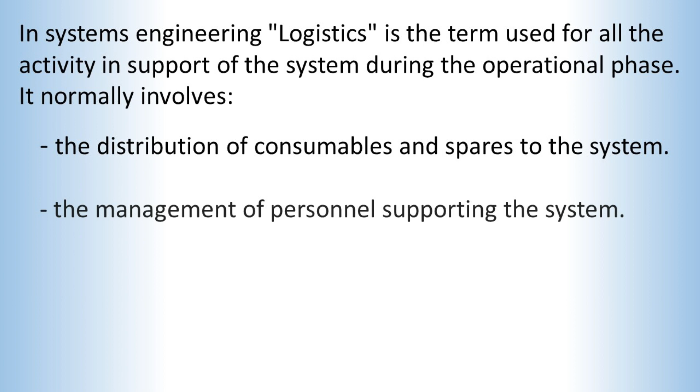In the systems engineering concept, logistics is the term we use for all the activity in support of the system during its operational phase, particularly from the player's point of view. It involves the distribution of consumables and spares to the system in the field, the management of support personnel, the maintenance of the system, any validation exercises, and indeed anything that is done to the system during its post-delivery lifecycle stages. The first three are primarily related to maintenance, and as they dominate, maintenance is often used as a synonym for logistics. So let's look at maintenance, what it is, and some aspects of how it influences design.

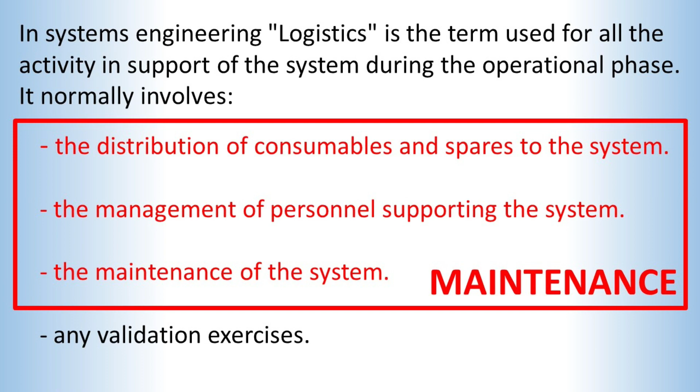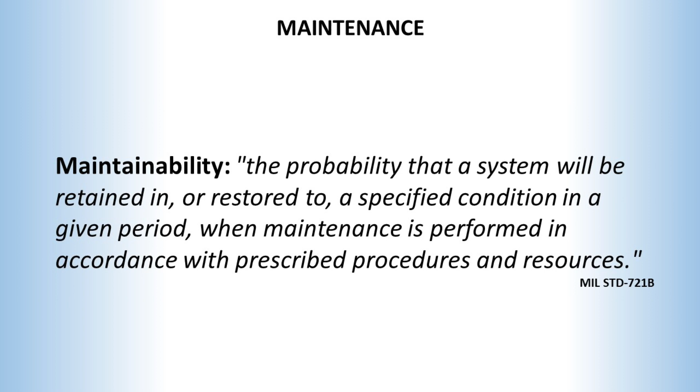As you are probably by now aware, my starting point for any new concept is to look at the definition of the word. So let's look at the view of the United States Department of Defense, who, with all those aeroplanes, warships and tanks, have a great interest in maintenance. So this is the definition of maintainability in the official United States standard on how maintenance should be incorporated into defence products.

There are several points about this definition that we should note. Firstly, it mentions both retained in and restored to, from which we can conclude that there may be at least two different types of activity. Secondly, note that success is defined as maintaining a specified state, that is, meeting its objectives. It relates to sustaining the system's quality. Thirdly, using the word prescribed implies maintenance is considered as an intentional design function that is incorporated into the system intentionally. And those last two factors make it a systems engineering activity.

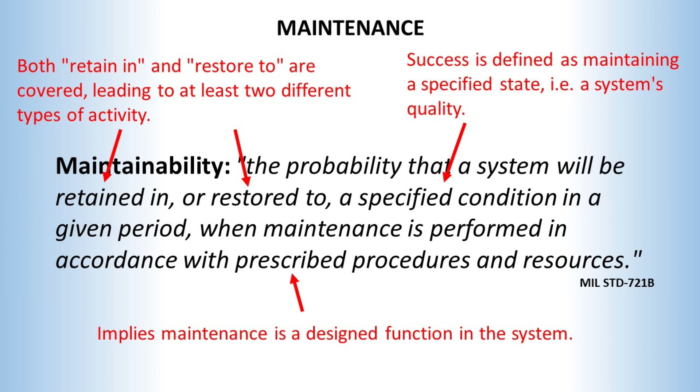It's not just big government customers buying F-35s and aircraft carriers that are interested in how maintenance is incorporated into a system. This concern covers almost everything that you buy. For example, mobile phones need batteries that charge. Now, charging a battery is maintenance, so you will be concerned about the charger. What mains plug does it have? What voltage does it operate at? And most importantly, what lead will you need? Come on, we've all been there.

Maintenance has a special role in the system life cycle, as it is the thing that blurs the boundary of the handover from the supplier, the players, to the customer, the stakeholders. It means that the player cannot wash their hands of the system after they've got the money. And it means the stakeholders, the customers, have to undertake some technical tasks, however simple and menial.

So after the delivery of the product, the manufacturer has to supply spares for it, issue warnings and recalls when faults are found, support the maintenance capability, and so on. And the customer has to undertake to do the specified servicing tasks and to maintain contact with the supplier, and so on.

Consider the implications when a supplier, and think Microsoft here, withdraws support for a product that is in service. And in the civil aviation world, an aircraft cannot fly unless there is a manufacturer identified to support it, which is a role that's designated the design authority. This was a contributing factor to the withdrawal of Concorde from service. It was that Airbus, who inherited this design authority position, stated that it was unwilling to continue to undertake this role.

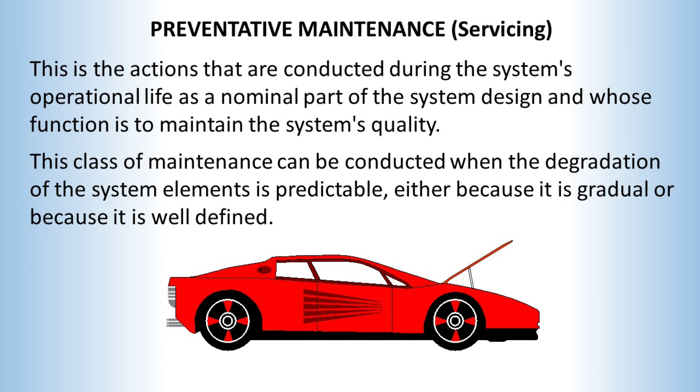So these are the actions that the user does as part of operating the system, often without really thinking about it. Servicing functions fall into four different types of action: first, replace consumables, or replace parts with limited life, or adjust the system, or inspect areas of concern.

Because it's a normal and intended part of the system function, preventative maintenance does not fall outside the system specification. Therefore, it's not grounds for a legal complaint against the producer when the system stops working because servicing was not conducted. After all, you could hardly sue BMW because your Mini ran out of petrol.

Preventative maintenance requirements are often explicitly included in the requirement specification, and if not there, it should be defined in the design specification. The exception is modifications to the system to correct an identified design weakness - car recalls are a classic consumer example.

Because it's done to reduce the risk of failure rather than as a response to an actual system failure, it's called preventative maintenance. However, as it is a response to what is effectively a failure to meet the specification fully, it is legally the responsibility of the producer to put it right, and is logically a type of corrective maintenance. So let us now turn our attention to that.

Repair can be in one of two forms. You either rework the originally installed item until it works again, or you replace the originally installed broken item with a new one. A key element of corrective maintenance is the detection of failure. Some failures do not show up directly in the overall system performance until secondary and normally much more expensive failures occur.

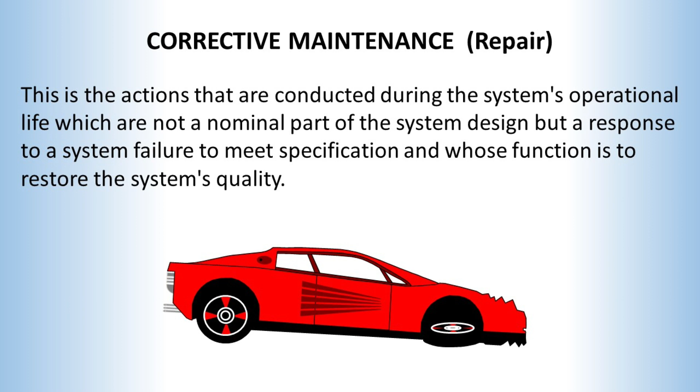Corrective maintenance is by definition unexpected, but to a degree one can design to expect the unexpected and increase the ease of repair activities, starting with detection - making sure that the failure is detected. With many complex systems, it may not be immediately apparent that the system has a failure. For example, if the brakes fail in a car, the driver will only be aware of this when they try to use them. Many would consider that a little too late.

So the car has warning lights to tell you that you may have a brake failure, or for example you may have low oil pressure, telling you to do something about the oil before the engine seizes. Often inspection activities, like checking the oil or checking the condition of the brakes during servicing, are also part of this failure detection strategy.

So what other design features can we employ to assist repair? Well, the first thing is protection - that is, putting barriers in that prevent hazards potentially causing any failure from reaching other sensitive components. We don't want chains of failures.

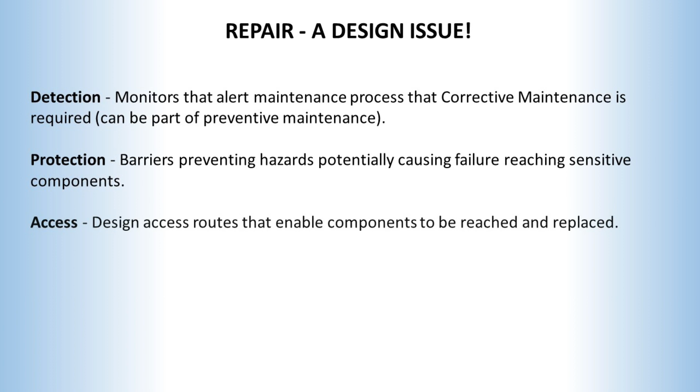Another important point is to design access routes that enable the components we're likely to need to look at and replace to be both reachable and replaceable. That brings in removability - we design elements that can be removed if required, such as bolting an electronics box into the main system, as opposed to welding it in.

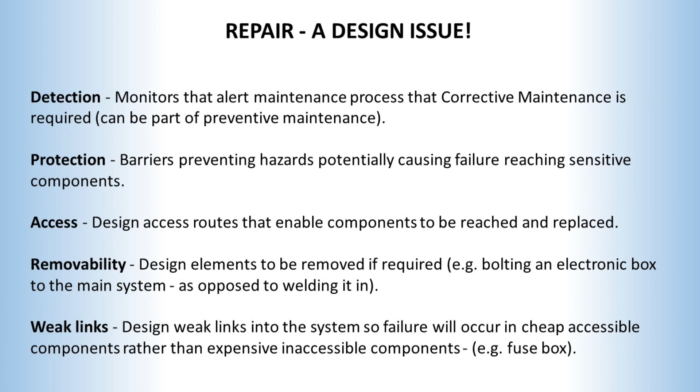And then finally there's weak links. If you can put a weak link into the chain, so any failure will happen in that cheap, accessible component rather than an expensive, inaccessible component elsewhere in the chain, then of course you would do that. This is the philosophy behind a fuse box.

One of the key concerns in designing maintenance on aircraft is to minimise the maintenance time needed, because of course while that's happening, it can't fly. This is measured by availability, which we'll cover a little later. But the key philosophy to speed up maintenance on aircraft is to identify the unit that is to be replaced without necessarily establishing what is precisely wrong with it, then remove and replace the whole unit. The removed unit can then be worked on without affecting the aircraft operation.

This was the philosophy behind the ARINC 404 ATR units, designed precisely to speed up replacing units on aircraft to keep them flying. Generically, any unit designed for removal during maintenance is called a line replaceable unit, or LRU. Likewise, in space, if a unit has been designed for removal by a spacesuited astronaut, it's called an orbital replaceable unit, an ORU. With the move to integrated avionics, with electronics generally shrinking so much, the things are covered in cabinets that contain standard electronic cards, and it's the cards that are replaced.

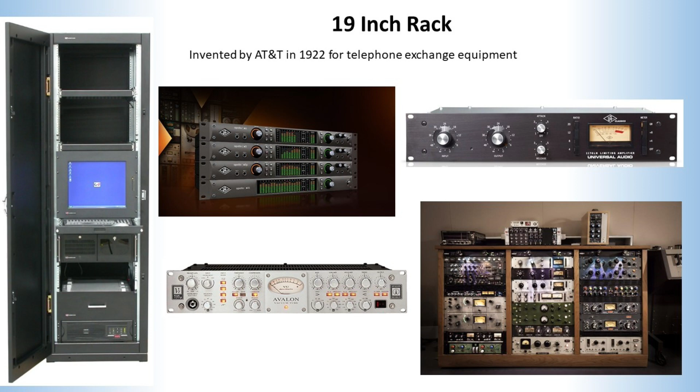In this case, the cards are called line replaceable modules, LRMs. Another example is the 19-inch rack standard for electronic units, so that individual units can be located together in a way that allows them to be easily removed and replaced. It's a standard devised by AT&T in 1922 for telephone exchanges, but it's now used almost everywhere, including in computing and music recording equipment.

And here is some sound equipment that I have that uses that 19-inch rack standard. It has even reached into space - in the non-Russian parts of the International Space Station, the modules are outfitted with standard racks which are themselves based on two columns of 19-inch rack-mounted equipment.

Perhaps we should just consider weak links for a moment. The classic and obvious one is fuses, where you blow a fuse rather than some more expensive electronic component further down the line. Another one is bumpers on a car, so that if you have a small biff, there's an easily replaceable body panel rather than an expensive panel that's welded into the main structure.

However, if you do it the other way around, which I once did, of course, bang, something blows in the machine. So you phone up Toshiba and they say they'll only service it on site. So a man comes in to service the machine, which meant I could see the power card as it came out. And sure enough, as you'd expect, they'd used fuses to prevent the main circuitry being damaged. But only one of the fuses was in a fuse holder. The other one they had soldered into the board.

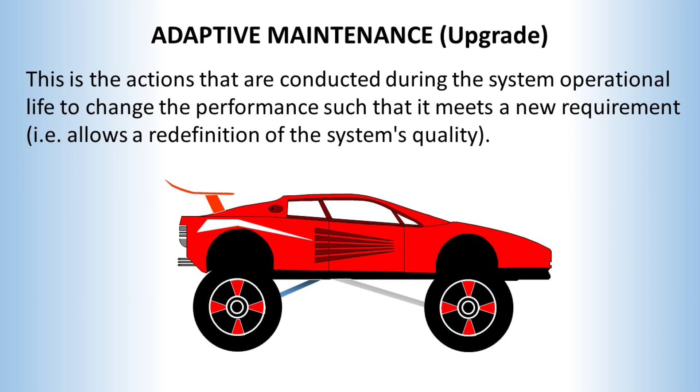It may sound initially that this is of no concern during the system design stage, but actually expandability can be specified. If customers want expansion potential, they must put the requirements for it in the requirement specification. This involves leaving capacity in the system beyond that required to meet its immediate objectives, and then entry points to give access to this capability, which are called hooks and scars.

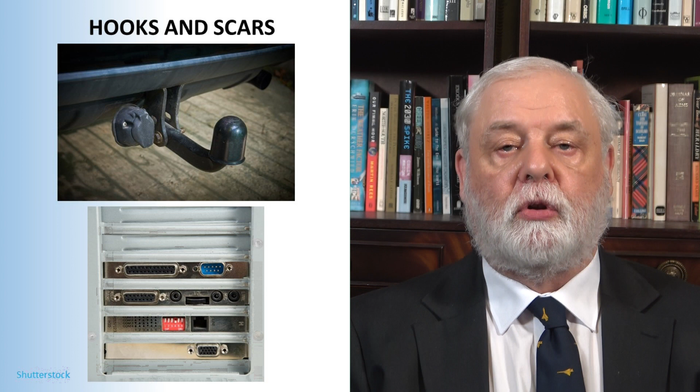In one paper I saw someone describe hooks as physical connection points and scars as software entry points, but I'm not sure that this is a widely used distinction. I think a better distinction, if there is any, is that hooks are the accommodation allowances generally and scars are the openings that allow connections into the system. Everyday examples are a towing hook on a car or the expansion slots on the back of a tower PC.

Here is another example of designing for adaptive maintenance, and it can be seen here on my bass guitar pedal board. The elements of the system are obviously the pedals, and there's also a power supply around the back and an overall structure. Its purpose is to alter the signal that comes in here from the guitar or bass guitar and process it to make it sound the way I would like it to sound, and then feed a signal out either to an amplifier or a PA system or a recording desk or whatever.

So in itself it would be considered, in the overall guitar system, a subsystem of the guitar system, but in this case we're going to consider it as a system in its own right.

And you can see here that it has had, well, the first thing you can see, it's had a bit of corrective maintenance to keep the tuner on the board securely. But at the moment this board is doing what I want. You'll notice here there is a bit of Velcro strip ready, and there's a power plug, so that a further box, not this one, can be added.

Now at the moment I don't know what I want it to do, if anything. I don't know whether I want it to be a phasey wazy or a flangy wangy or even a fuzzy buzzy sound, but the hooks and scars are already here, so I can add them to this board without having to start all over again.

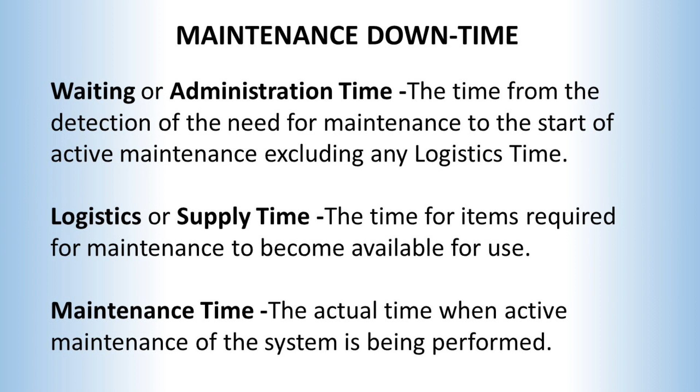Now, in theory, administration time and logistics time should really only apply to corrective maintenance, since the system can be operational while preparation for preventative maintenance is being performed, and therefore the system is not out of action. However, any car owner will know the practice in real life. So there we have it.

Obviously, maintenance can greatly affect the customer's experience of using a system. And that is something that you would really want to nail in the requirement specification. The question is, how? One way to do this is the concept of availability.

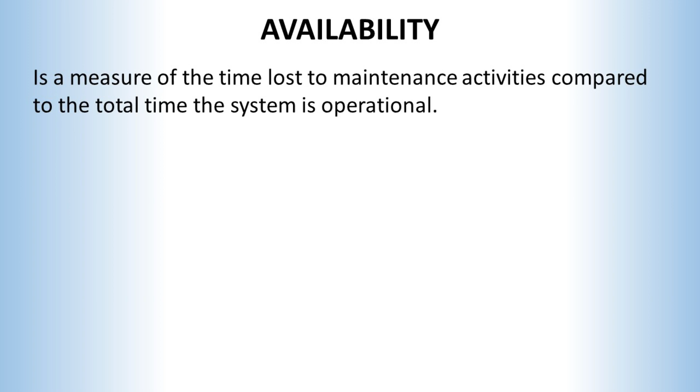Availability is a measure of how much of the overall operational life of the system it is actually operational, either in use or ready for use. I want to use the system - what is the probability I can? In other words, it is a measure of the time lost to maintenance activities compared to the total system lifetime.

It's measured as a probability, so an availability of 50% would mean that for half the time of the system, it is in for maintenance and cannot be used. Aircraft with low availability are often called hangar queens, and in the 1980s some fighter aircraft could only achieve availabilities of 14%.

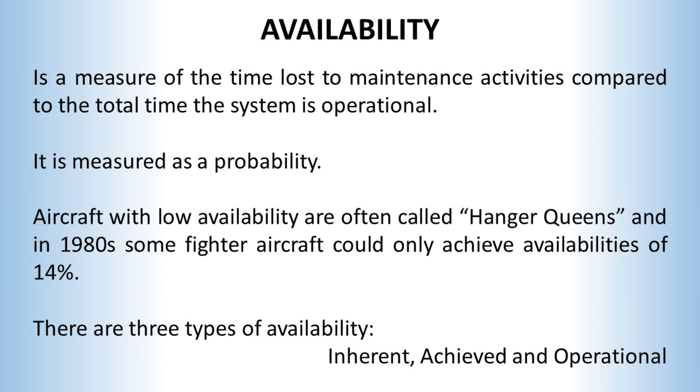Availability can be defined in three ways. The first type is inherent availability. As the name suggests, this is the underlying probability that the system will be available with quality due to its design and build, and it corresponds most closely to reliability. It is the factor of total time spent on planned preventative maintenance, and it ignores any time lost due to corrective maintenance, and it is something that is in the control of the system builders and could be placed in a system requirement specification.

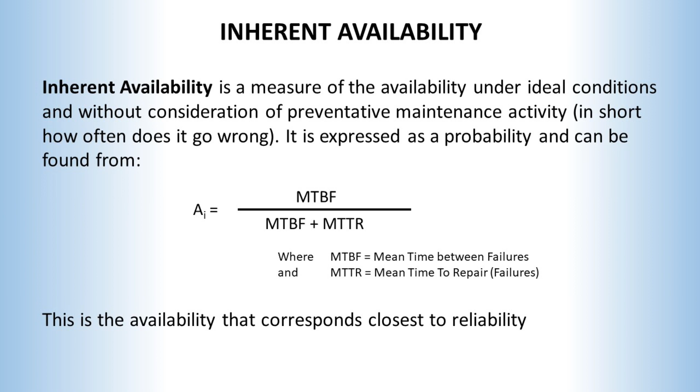The next type is achieved availability, and this differs from inherent availability in that it includes the corrective as well as the preventative maintenance. Now, the designer cannot control the amount of corrective maintenance, as that is due to how the operator uses it. However, it is the availability that best defines how good the system design is, because although achieved availability could not be directly specified, there could be requirements on how long and expensive likely repairs will take.

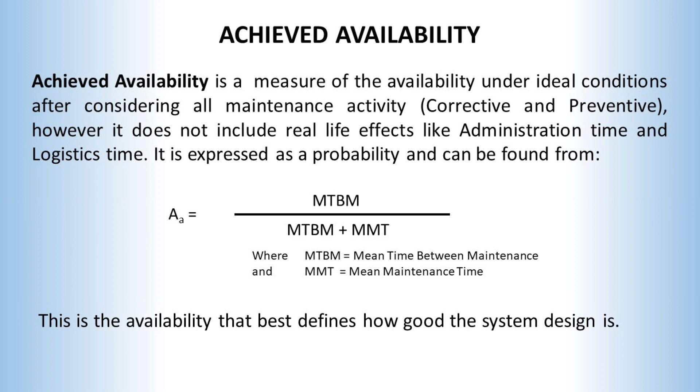Finally, there is operational availability, and this is the measure of how often the system is actually ready in the real world when required to do so. So in addition to the time required to perform the various types of maintenance, it includes all those real life effects that are covered in maintenance downtime. This is difficult to establish at the design stage, as the maintenance downtime is more the responsibility of the operator, and so is a metric more often used to evaluate them.

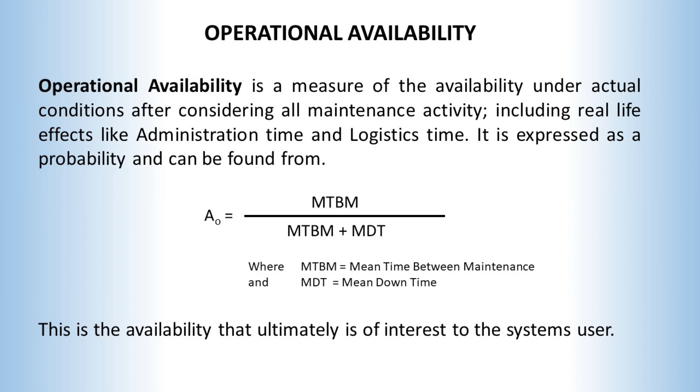Let's put this in aircraft terms. Inherent availability is in the hands of the aircraft constructor, the Boeing, the Airbus, and they can determine how much preventative maintenance their aircraft requires. Now, the achieved availability is a grey area between the constructor, the Airbuses and the Boeings, and the airlines, the British Airways and the Qantases and the Emirates of this world. The constructor does have this control about how long and difficult it is to perform a repair, but it is the airline, the British Airways, etc., who control how often that repair is needed.

And then we come to operational availability, and this is pretty much in the control of the airline - how well are they managing their logistics? Well, Mark, I think it's time for this video's summary. Yep, and here it is.

We started with a concept of logistics, which is just a term we use to define everything that we do to a system when it's in its operational life. And we saw that the biggest and most important part of that is maintenance, which are all the activities that are required to maintain the system's quality in service. We saw that there are three types of maintenance.

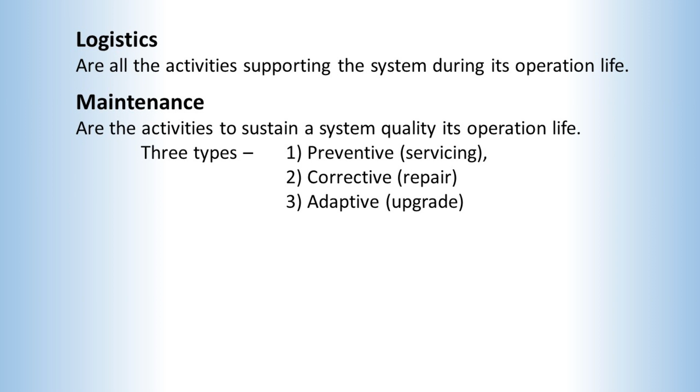The first type is preventative maintenance, which we would normally call servicing. The second type is corrective maintenance, which we would normally call repair, and the third type is adaptive maintenance, which we would normally call upgrade. Now, maintenance takes time, and while a system is being worked on, that is a loss of operating time, and we can measure that in a concept of availability, which is the probability that the system is there with its quality when it is wanted.

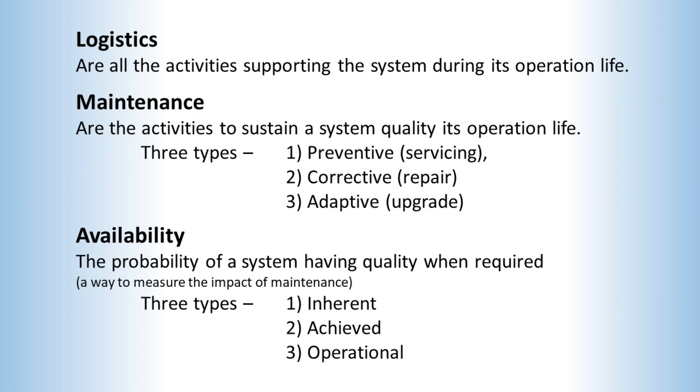And again, there are three types. There is inherent availability that measures the loss due to planned preventative maintenance, achieved availability that measures the time lost to both preventative maintenance and corrective maintenance, and then there is operational availability that measures all the real world time lost due to the maintenance downtime that includes all the administration and logistics time.

In the next video, we'll look at the third area that the Quality Control Department normally covers, and that is safety.